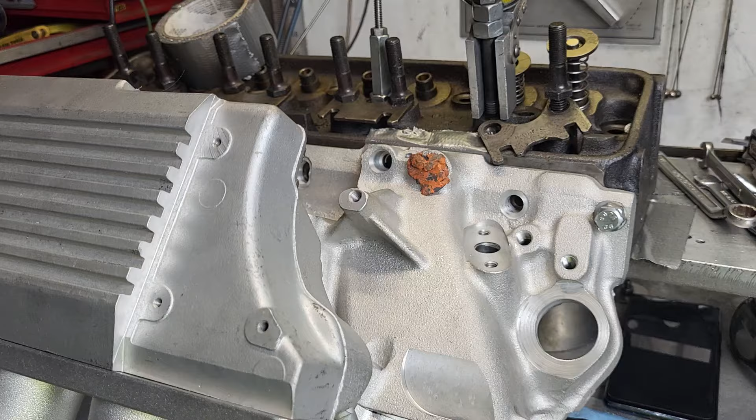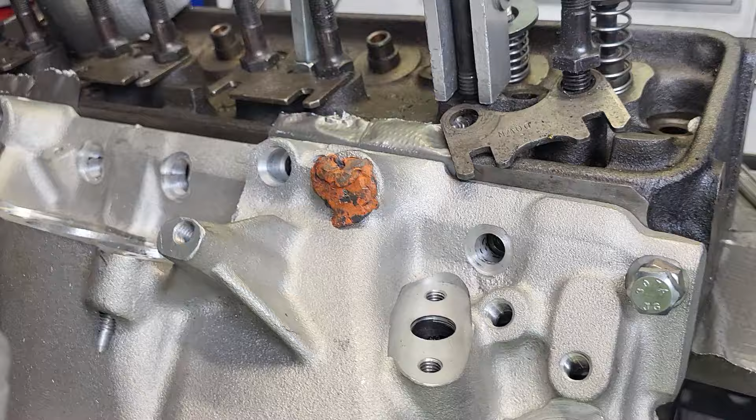Okay, guys, today was just bolt everything up and see what the Dart 165s did after I did that little bit more work to them, and then go heads up with my old Chevelle Bowties. Now, I remember the old Chevelle Bowties flowed about 305 last time I ran them, but this may not necessarily be the exact cylinder I tested last time. So today they flowed a little bit less than that, which it's also a hot day already.

So what did we wind up doing? Well, we tested both heads bare, and then we tested both heads with everything assembled through our worst runner to see, it's not really an apples to apples comparison, but is it really worth it putting bigger valves in the 165 since the air speeds are so good? Now, it's kind of a skewed test. The Bowties have like 215cc ports with a 2055 valve and a 1206 interface. Okay, it's way big. Now, that interface here may be helping.

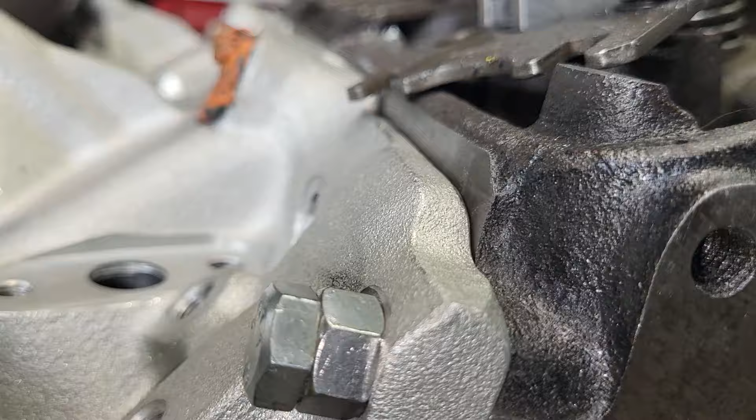Something to think about. Remember, we're coming out at a real low angle, right? Real low compared to the head itself. So it's aimed directly at that roof. Now that the roof has been moved up, that might help. Good to keep in mind. Somewhere I have other videos on these Bowties. They're done up pretty nice. I'm pretty happy with them the way they are. Even though my flow test today was less than I would usually see. Doesn't really matter. It could be a couple different reasons for that.

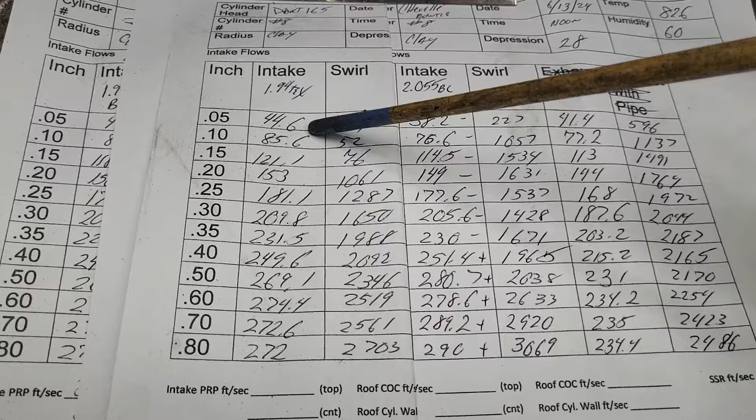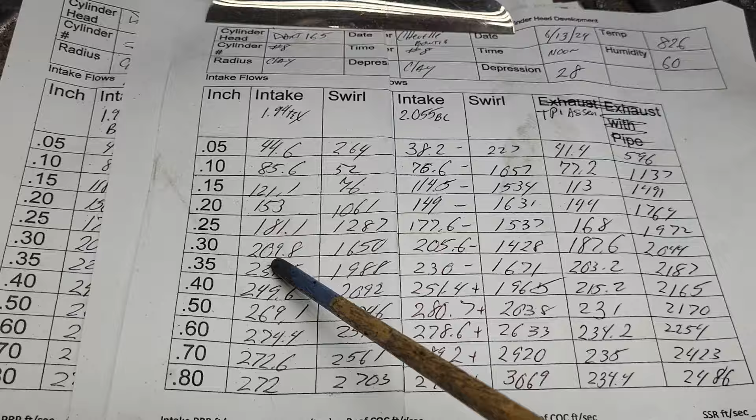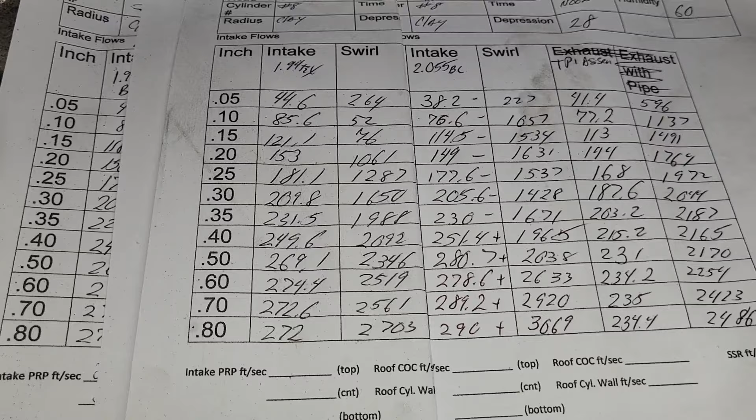Okay, guys, so this is what we got. This is today's test, number 8 cylinder in the 165 Darts. They actually flowed a little bit better than last time we saw it. Last time we saw it, it only had like a 205 or a 206 at 300, but it was only like 80 degrees when I did this. Okay, we top out at 274.4, which is almost exactly what I got my Dart 165s with 202s in them. All right, our swirls are good.

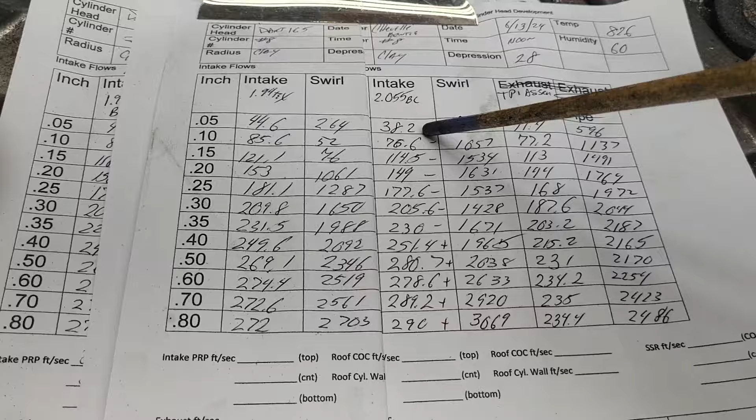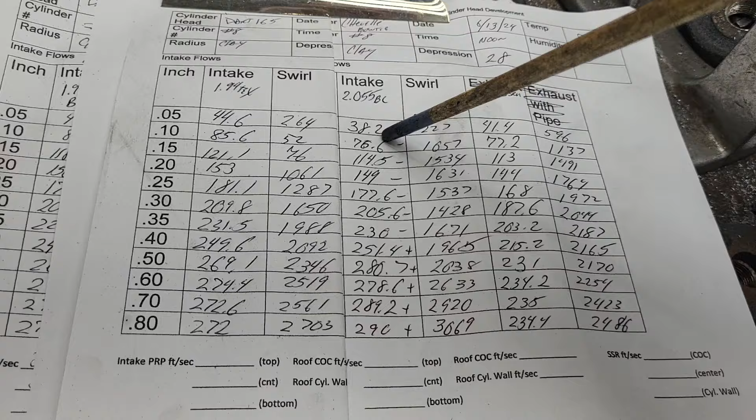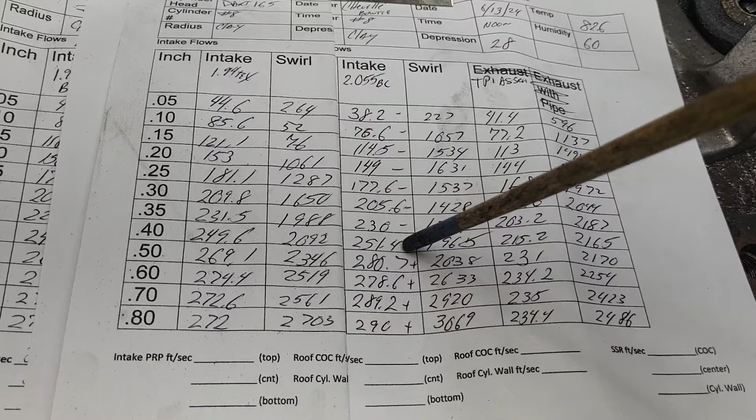Then we take my Chevelle Bowtie. We take the number 8 cylinder, 2055 with a back cut, and we flow it. We got minuses everywhere. Charlie, how's that possible? Well, because it's a cylinder head that's bigger by a lot. Okay, you're going like 180 and change to 215. Huge difference in volume, right? Even though it's a bigger valve, it's not as efficient at the lower lifts. And it's not as efficient all the way up to 400. At 400, we get a boost, okay? The Bowtie's finally winning. Now, this is an excellent running head the way it is.

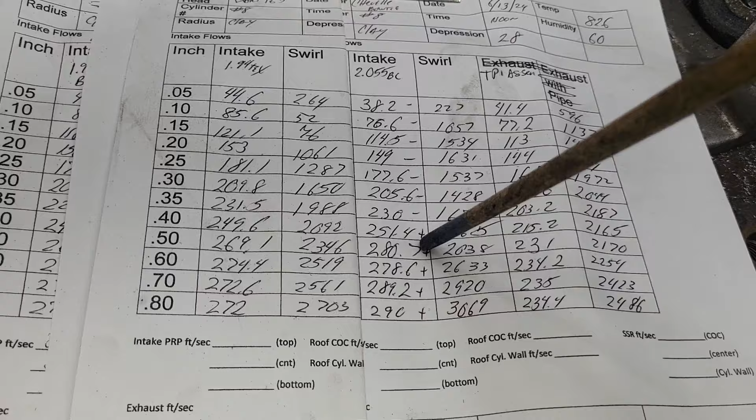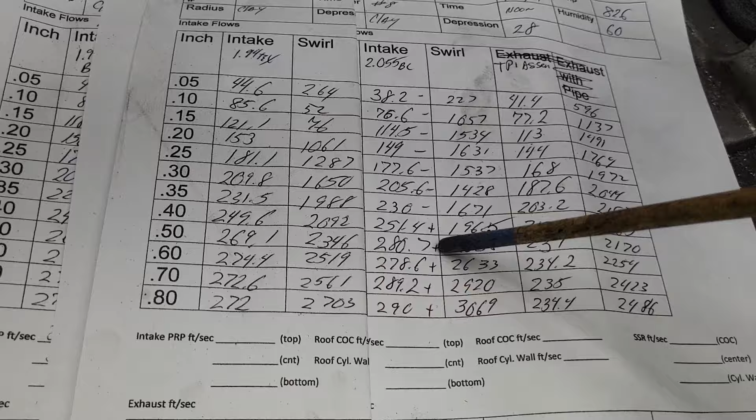Okay, I've had it on the car. And I think when I first took them off the car, they only flowed about 282. They flow a touch more now. Obviously, it's had some work done to it since then. In any case, we get a touch more here, touch more here, touch more here. Okay, so we get our gains at the top end with the Bowtie. Good high performance setup. Is it dead?

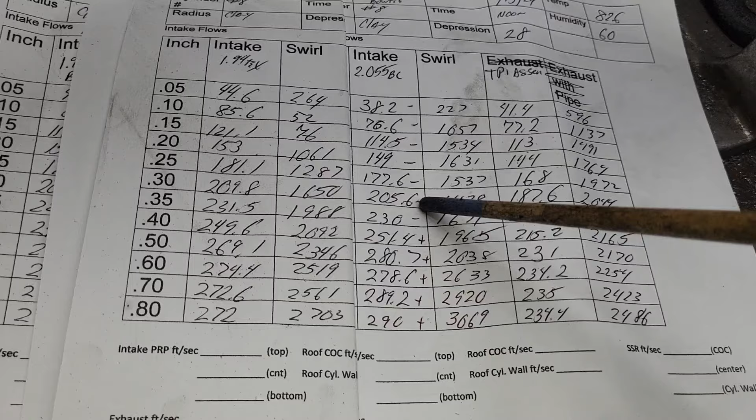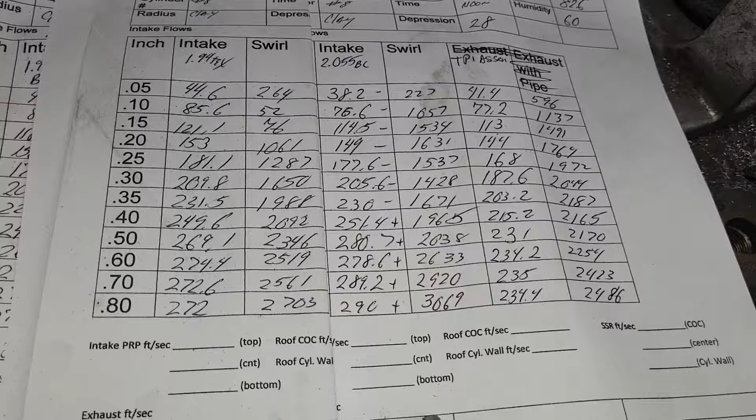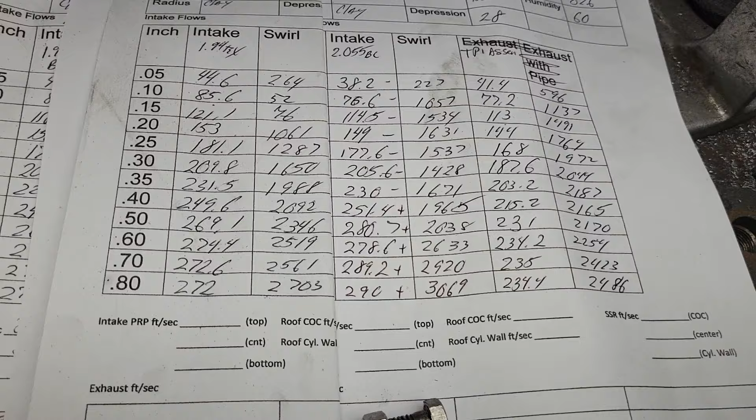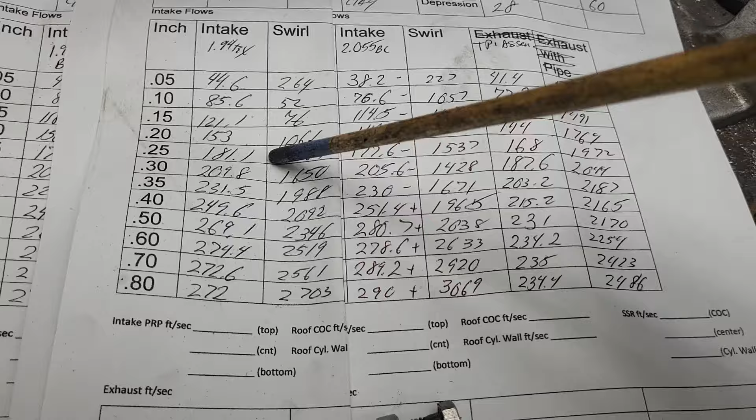Well, at 300 with 205.6, which isn't bad, but these numbers are definitely a little bit lower than these. These are very high though. I've got the airspeeds really kicking butt on those heads, and the efficiency in this area is quite good. I mean, almost 250 at 400. Very good. Is it an anomaly? I don't think so. I think it's a good design, and I definitely helped it out a little bit. Okay, so what do we do from that point? Well, I take this and I put the TPI and all the goodies on this, and I do the same with this, and we'll compare them.

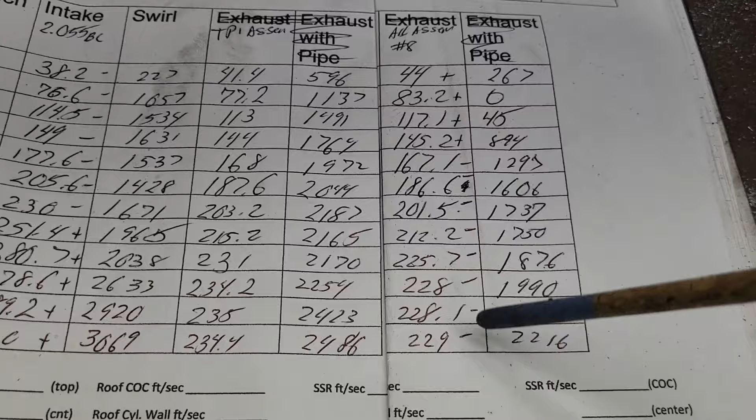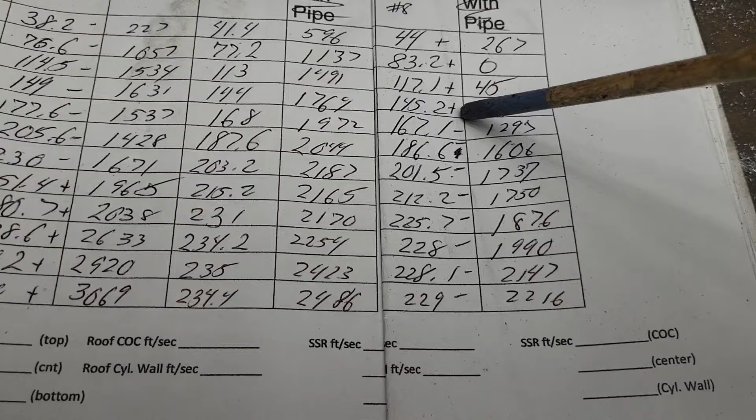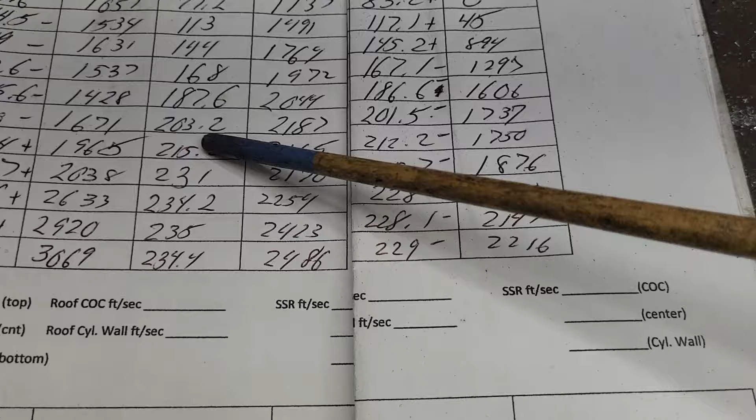Okay, let's make sure we do this right. This is the Dart 165 through all assembled number 8. This is our Bowtie all assembled through the TPI. We obviously top out better. These pluses and minuses are in reference to the Bowtie. All right, these are stronger up to 200 thousandths. That's it. After that, all of these are better. How much are they better? Tiny bit, tiny bit. If 500 was starting to pick up, you got 6 about. A huge difference? I don't know if it's worth it. I mean, you have to remember it's a huge port compared to it. And it may just be that interface.

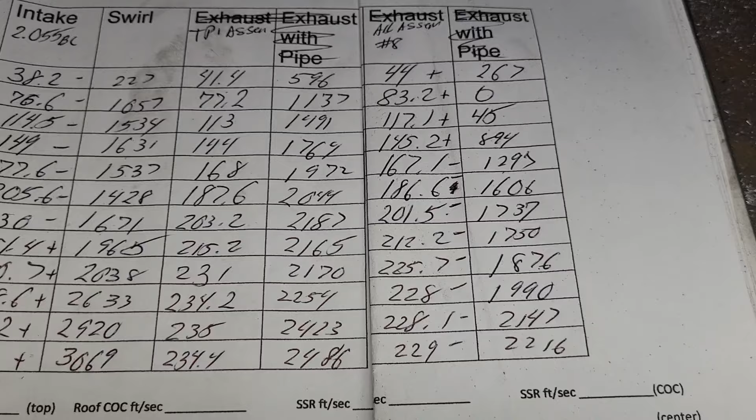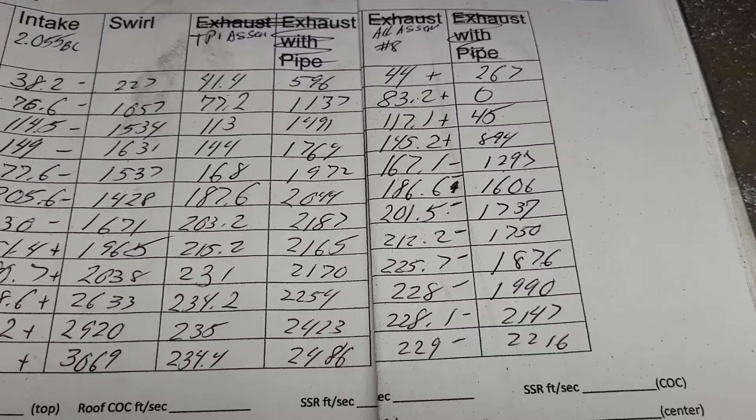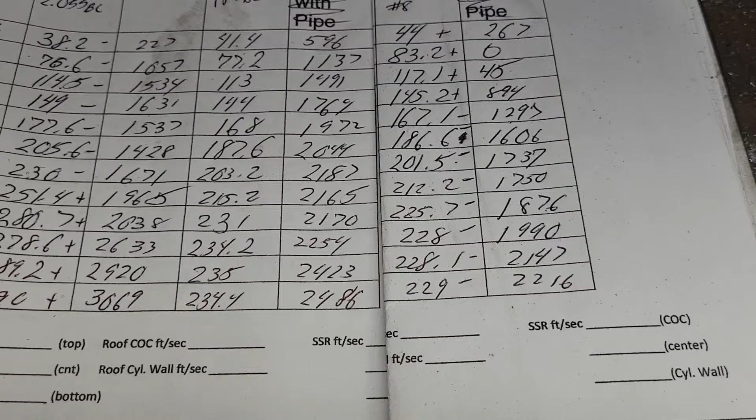I want to push that pinch up a little bit more. By the way, the owner said he is going to build a 383 for the bottom, so that has to be figured into our calculations as well. It's going to have a bigger mill under it sucking, so that will change our pressure differential going through the ports. Interesting to think about, right, guys? Well, like I said, it's not really an apples to apples, but give me your input on whether you think the bigger valves are going to make a difference.

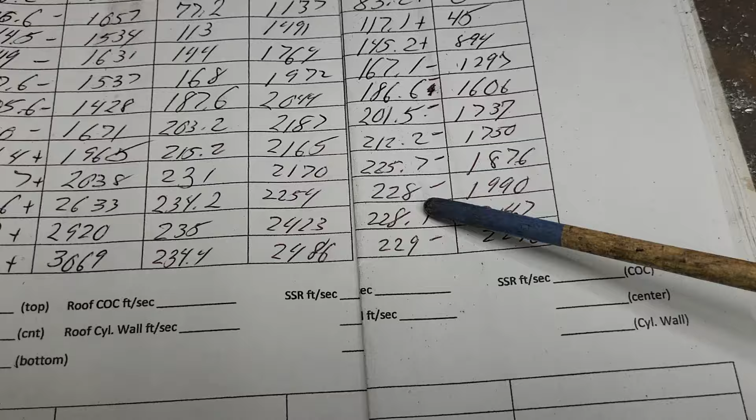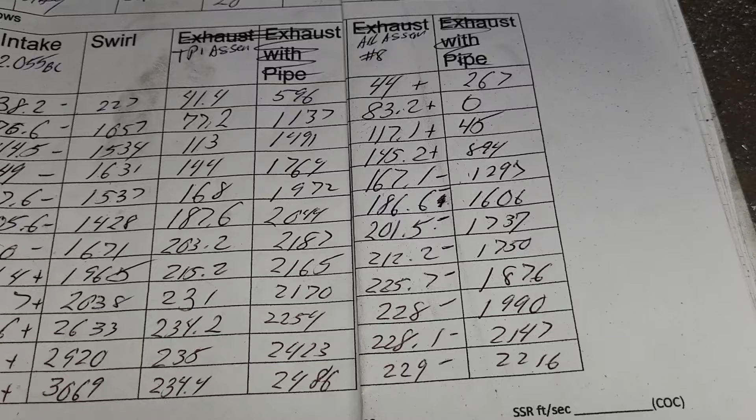I keep fighting with this. All right, this is number 8. It's the lowest flowing number. I am thinking maybe I should at least fill that corner with clay and see what we get. I have a feeling after Brett sees that, he'll want me to fill that with epoxy and get that done, which is not a problem. I could do that for him.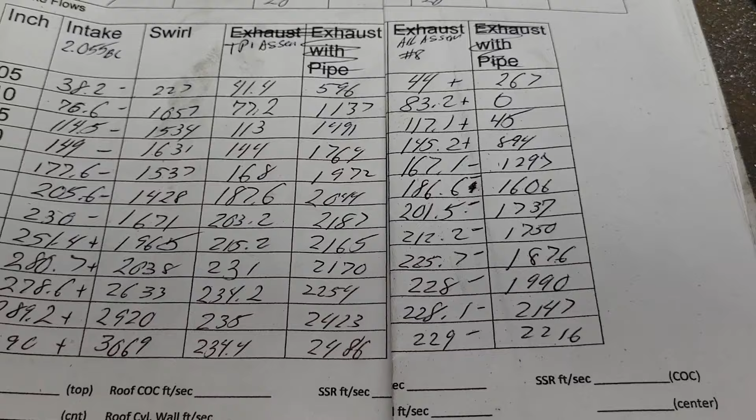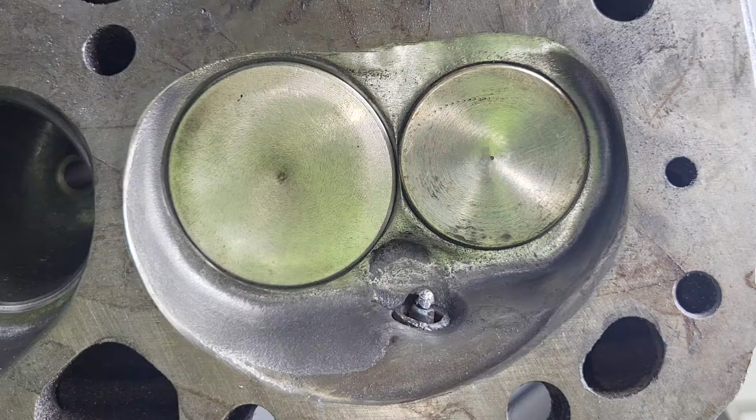Let me pause this and see if I can think of anything else important to talk about. I think, to be fair, I should take this apart and at least show you the Bowties, so I'm going to put you guys on pause for a bit. Okay, this is what they look like assembled. You can see it has my chamber cut that I do on the Fuelies. Not quite as radical as I do on most Fuelies. And the chamber cutouts, that was from the early 90s when I first got these.

Okay, the intake port looks pretty good, but the valve job is obviously not completely finished the way I would like it to be. It's definitely off a touch. Like that bottom cut is not blended the way I would want it to be, so that might be where a few of my CFM are. That does tend to happen. If I lose interest in a project, I'll have to pick it back up and I have to go through everything and make sure it's what it should be.

In any case, the valve is actually one of my old throttle body injection valves that I used on the swirl ports on my truck in the late 80s. Ceramic coated. Pretty cool, right? In any case, these are a nice head for what they are. And I don't know. I'm still wondering. Do you think it's worth putting bigger valves in those 165s?